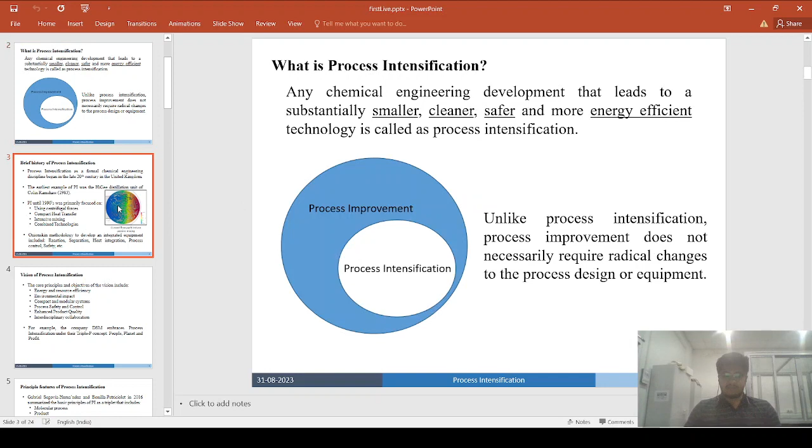So now we have first defined what is process intensification, then discussed the brief history of process intensification. Much more detail on the history has been discussed by Professor S.K. Majumder, whose course this is, so you can go through that.

And then after the history, what is the vision of process intensification? While performing process intensification, what does it provide to you? The vision of process intensification is actually quite a subjective topic, and it differs from company to company, organization to organization, institute to institute. But the core principles and objectives can be defined in 6 simple points.

The core principle behind process intensification is that we need to efficiently use energy and resources - raw products and energy must be used in an efficient manner, with no wastage of the raw product or energy used. The second vision of process intensification is to reduce the environmental impact of the particular process or plant.

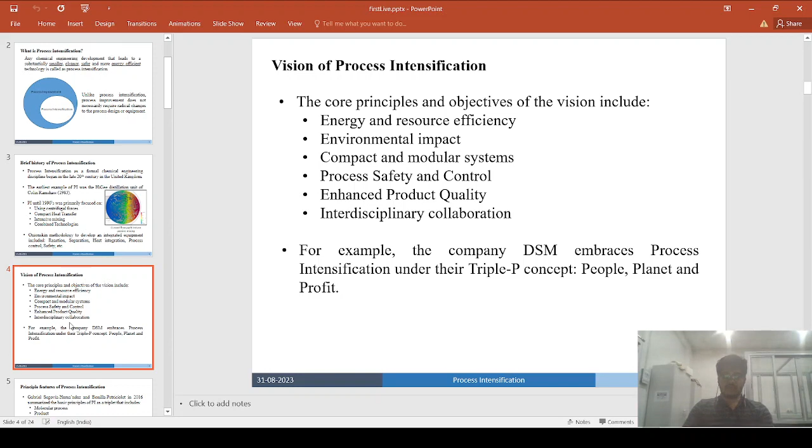Now coming to the principal features of process intensification. We have gone through what is process intensification, its brief history, and the vision of process intensification. Now coming to the principal features—how can you identify, or what are the features of process intensification, what it can bring to the table.

This has been nicely summarized by Gabriel Segovia Hernandez and Bonilla Petriciolet in 2016, that process intensification features can be summarized in three steps, or a triplet: molecular process, product, and process engineering.

First you start optimizing or intensifying the molecular processes itself, the reaction step—when one species reacts with another, how can you intensify or perform it better. Then once you perform the reaction better, keeping in mind your selectivity and conversion rate, you optimize as much as you can with the molecular process itself: how much temperature and pressure you can give it.

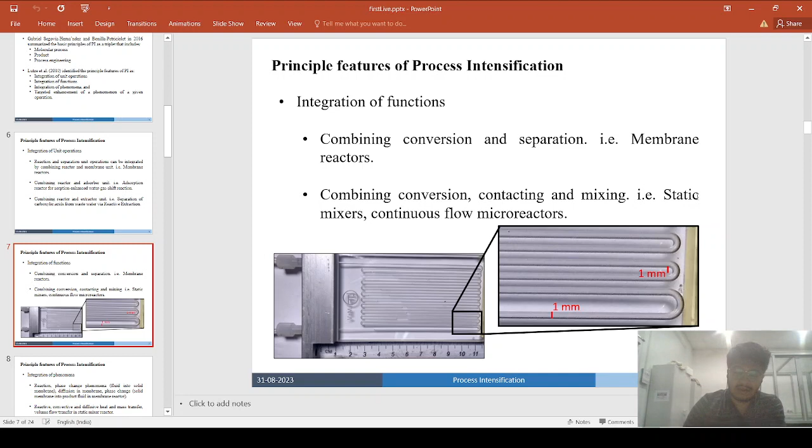So the contact happens due to significant increment in the specific area, or net available area for heat and mass transfer, and the mixing happens due to the curved flow path, and the conversion automatically increases in microreactors. This is one integration of function, combining conversion, contacting, and mixing, all three in a continuous flow microreactor, and similar can be done for static mixers also.

The third principal feature given by Lutze et al. 2010 is integration of phenomena. Different phenomena can also be integrated. For example, reaction, phase change phenomena, and diffusion in a membrane with phase change can be integrated into one - the reaction is happening and the phase change is also happening, so you can combine and integrate both. Another great example is reactive, convective, diffusive heat and mass transfer, volume flow transfer.

In a static mixer reactor. Just a minute.

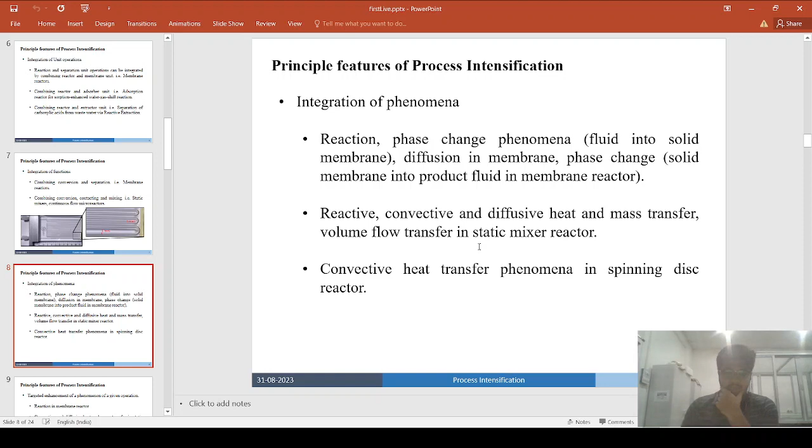The fourth principal feature given by Lutze 2010 is targeted enhancement of the phenomenon of a given operation - for example, reaction in a membrane reactor. You can enhance this by doping the membrane with a certain catalyst, which can enhance the reaction happening in the membrane reactor. Separation can be controlled, but enhancement of the reaction happens by choosing a different catalyst, or doping the membrane with it.

Another example is convective and diffusive heat and mass transfer in the static mixer reactor, which also comes under integration of phenomenon, but you can also target that. So integration of phenomenon combines two phenomena, but you can also target the enhancement of a particular phenomenon that you choose.

Another was convective heat transfer phenomenon in spinning disk reactor. In the spinning disk reactor, you use the centrifugal forces to create artificial gravity, like the HiGee distillation plant by Ramshaw. It's called high-G because G's are multipliers to gravitational force, like 1G and 2G, what pilots experience. Similarly, in the spinning disk reactor, you use centrifugal force to provide very high forces, termed high-G forces, which let you perform or enhance high convective heat transfer phenomena.

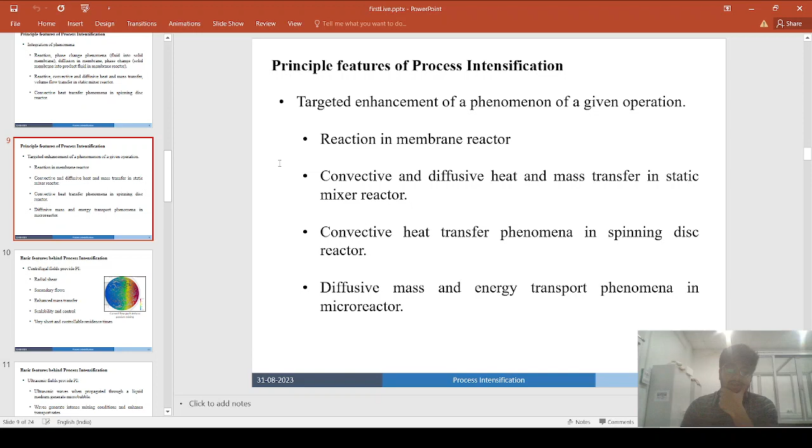That is the basic gist behind the four principal features that Lutze et al. gave in 2010. So now if you look at these basic features, these were the principal features that Lutze presented.

Now, if you've caught on to the common pattern, they all use some sort of unconventional field to enhance a phenomenon. In the high-G distillation tower, they use the centrifugal field, and even in the microreactor, to enhance passive mixing they use the centrifugal field of the curved microchannel to achieve process intensification. You can also use the ultrasonic field to perform cavitation and generate micro bubbles—that's another idea.

You can also use electric fields to generate chemical radicals or species radicals that enhance reaction steps. You can use electric fields, or electromagnetic fields, to target uniform heating in a specific area. Electromagnetic fields in the longer wavelength range include microwaves, and going shorter, past infrared, you get visible light. You can use visible light or general electromagnetic radiation to perform photoinitiation or photochemical reactions, targeting your light source, and these days you can also use lasers.

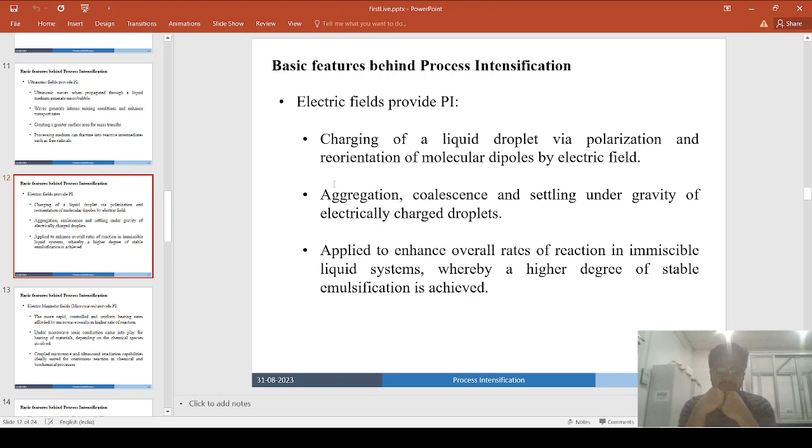To generate that stable emulsion, you can polarize those proteins, and because of that polarization they can form micelle structures, and remain in the emulsion state for a very long period of time. This can be controlled if you use an electrically charged droplet, so aggregation, coalescence and settling under gravity can be controlled.

It can also be applied to enhance the overall rate of reaction in an immiscible liquid system, whereby a higher degree of stable emulsification is achieved.

Protein globules and water are basically immiscible liquid systems. So how to make a stable emulsion is basically the way you can enhance the overall reaction rate. If both phases separate, you might not get good mixing and your reaction rate will get hampered. So a way is to make a stable emulsion, and this can be achieved by applying an electric field to perform process intensification.

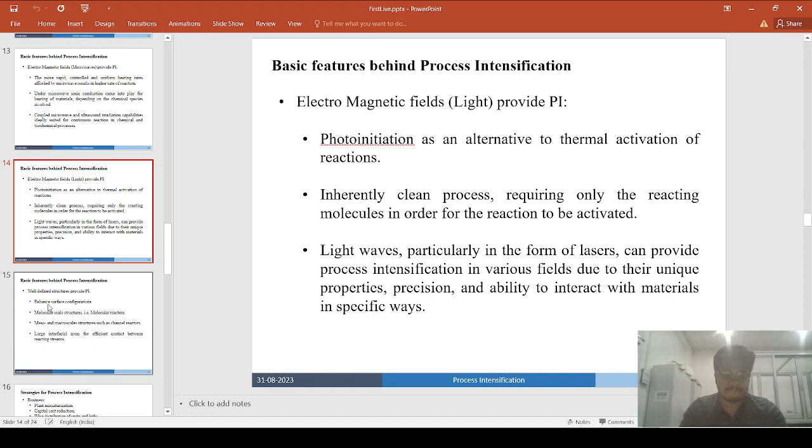Now, well-defined structures also provide process intensification. For example, you can enhance the surface configuration, like with lasers, to make surface areas of different properties, different wettability, or different surface roughness.

Another thing is molecular scale structures. There are various papers where they have made molecular cylinders. The reaction substrate looks quite smooth, but under a confocal microscope with objective lenses, you see small cylindrical structures where catalysts are loaded, or the cylindrical structures are doped with such catalysts. They basically mimic the finger-like structures we have in our intestine, enhancing the net available surface area for reaction or adsorption to occur.

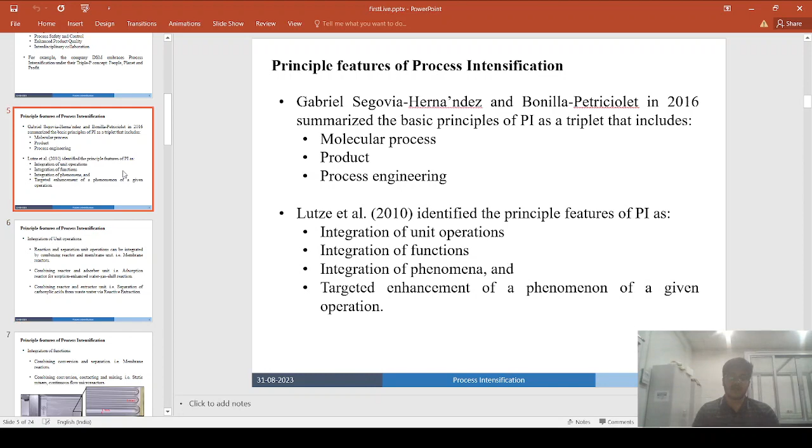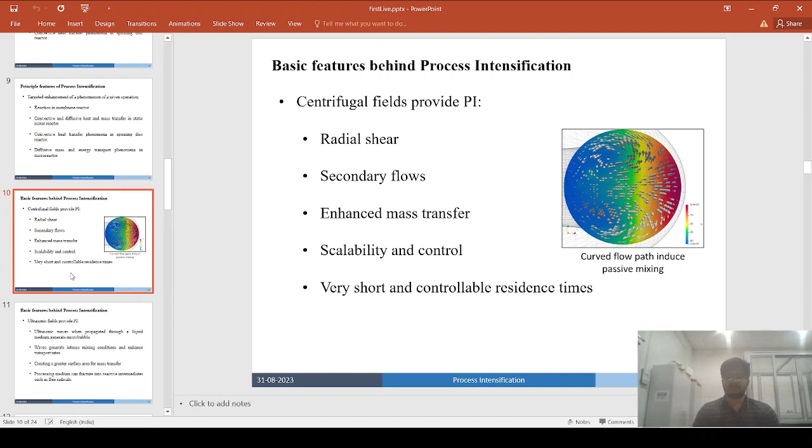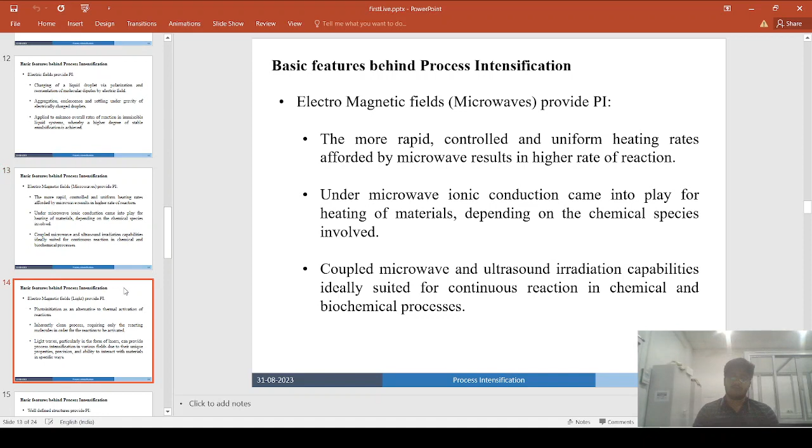So these four were the principal features. We have discussed in detail the four principal features by Lutze 2010, and then we discussed the basic features that can provide process intensification, like centrifugal field, ultrasonic field, electric field, electromagnetic field in the microwave range, and electromagnetic field in the visible light range. And then we discussed how you can also use well-defined structures to perform process intensification.

Okay, so let us discuss the strategies for process intensification, what strategies are available. There are various ways to define strategy for process intensification, but broadly they can be classified into three domains, or three classes.

On the business side, what process intensification looks like is plant miniaturization: how small, or how much, can you miniaturize your plant, so that some area or volume is not wasted. This means reduction in the spatial volume where the plant resides. If you occupy less spatial volume, you need to pay less rent, or less for the smaller area of land that you purchase. So that is the idea of plant miniaturization, to optimally use the area and volume available to you.

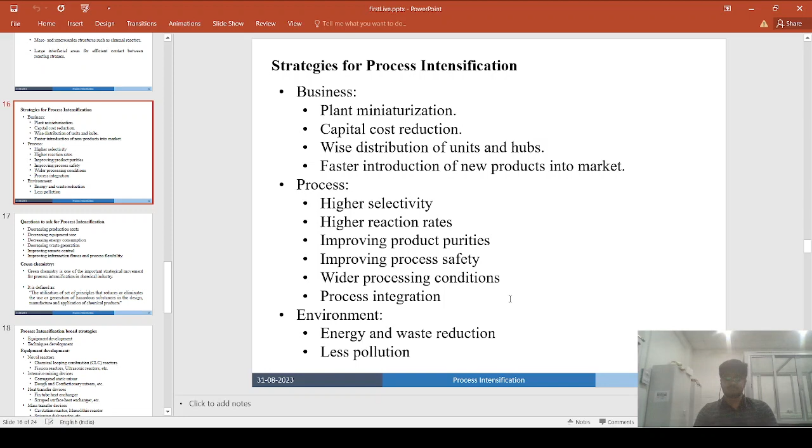Now, what are the general questions to be asked for process intensification? Process intensification is a very wide area and a very hot topic for research. So where do you start? Where do you generally start? When you have a lot of options, when there is a wide area, you basically ask the question: leave everything aside, where do I start? What is the initial point?

There is no single hard and fast rule with process intensification. It is not that this is the line and you must march on this line only. But you can start by asking the right questions.

How can I decrease my production cost, or how can I decrease my equipment size, or how can I decrease my energy consumption, or how can I decrease my waste generation, or how can I improve my remote control? How much of the plant can I operate remotely, and how much can I improve the information fluxes and process flexibility.

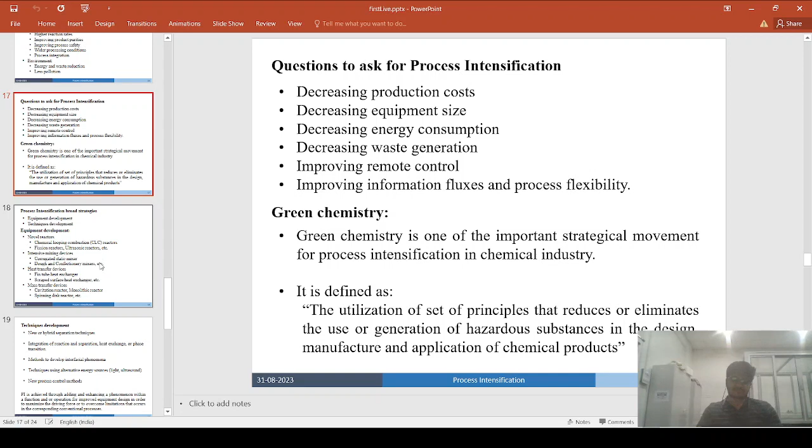The process intensification strategies can be classified in multiple ways. A broad classification has two types: equipment development strategy and techniques development strategy. The equipment development strategy involves improving or developing your equipment, or developing novel reactors. That's one thing. Or you can improve an existing process or existing reactor like a CSTR.

You can change the shape and size of the stirrer to optimally mix a certain viscous liquid, for a given liquid or gas-liquid system. This is basically the idea behind equipment development.

These equipment development strategies involve development of novel reactors—for example, chemical looping combustion (CLC) reactors, or developing fission reactors or ultrasonic reactors, etc.—and the use of intensive mixing devices.

You change your standard mixers into better intensive mixing devices, like corrugated static mixers, or for highly viscous or thick consistency materials, you can use modern developed dough and confectionery mixers. So you replace conventional mixing devices with intensive mixing devices suited to your systems, and also heat transfer devices.

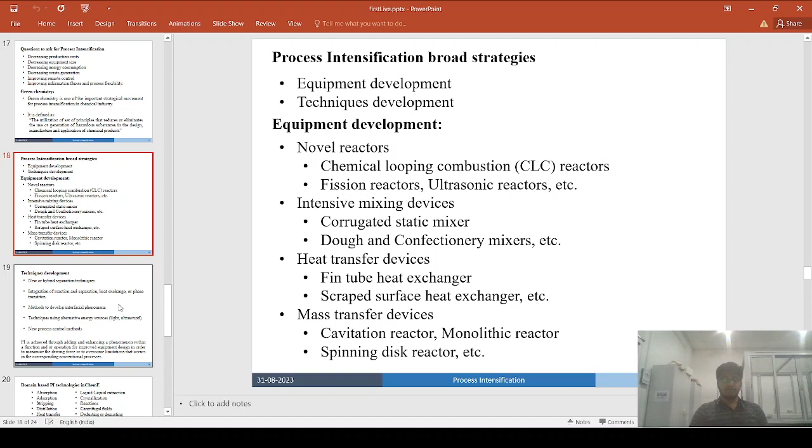So we discussed the equipment development strategy. Another is the technique development strategy.

Here you basically improve or utilize new or hybrid separation techniques to perform separation instead of standard separation techniques. Or you can integrate the reaction and separation and heat exchange or phase transition together itself. So this is one example. And you can think of methods to develop or enhance interfacial phenomena, using micro reactors, so that you can enhance the net available surface area. So that is one technique.

Or techniques using alternative energy sources like light or ultrasound. Or you can use new process control methods. So that is the idea behind that.

So process intensification is ultimately achieved through adding and enhancing a phenomenon within a function or operation for improved equipment design, in order to maximize the driving force or to overcome limitations that occur in the corresponding conventional processes. So process intensification can be achieved by adding or enhancing a particular phenomena occurring within a function, or by enhancing the operation for improved equipment design, in order to maximize the driving force or overcome the limitations in conventional processes. This is the idea behind process intensification.

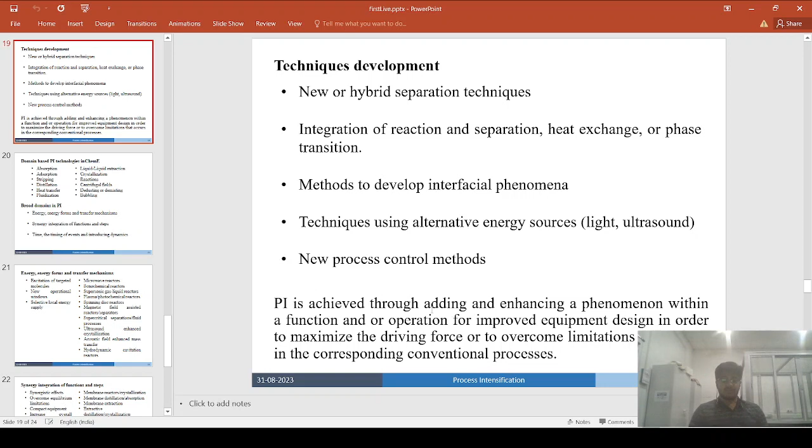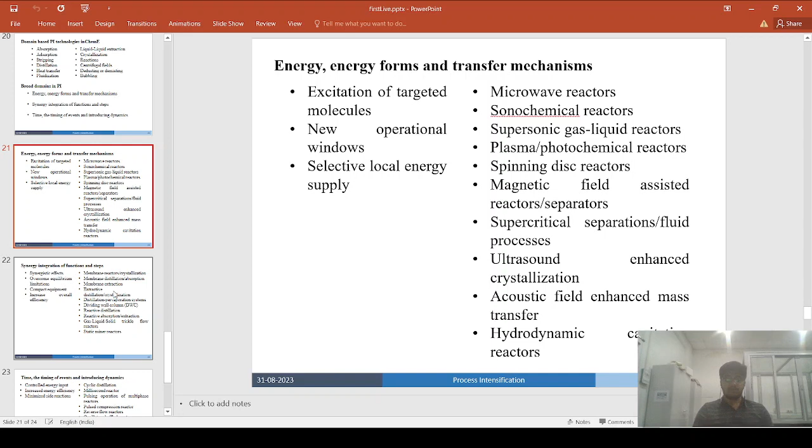So these were the examples for process intensification with focus on energy forms and transfer mechanism. Now, if you want to perform process intensification with focus on synergistic integration of function and steps, your focuses should be on synergistic effects, overcoming equilibrium limitations, and making your equipment compact.

And the last, very important focus you should put emphasis on is how to increase overall efficiency.

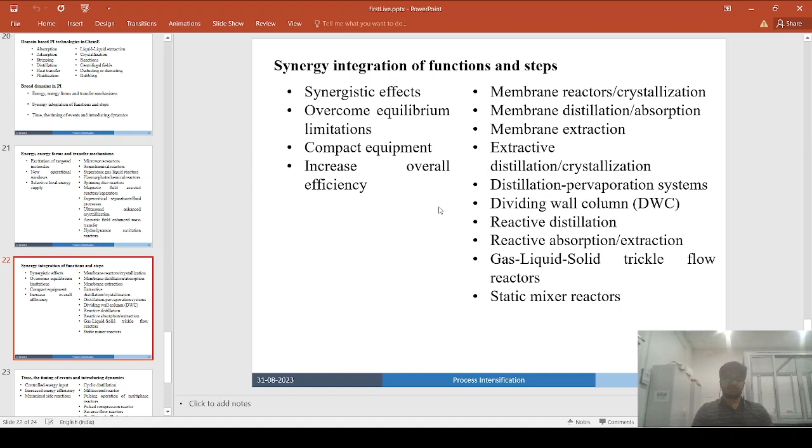Some examples here are membrane reactor and crystallization, membrane distillation absorption, membrane extraction, extractive distillation crystallization, distillation-pervaporation systems, dividing wall column, reactive distillation, reactive absorption extraction, gas-liquid-solid trickle flow reactors, and static mixer reactors - examples for process intensification focused on synergistic integration of function and steps.

Now, if you want to perform process intensification with focus on timing of events and introducing dynamics, the focus should be on controlled energy input. For example, if I want to irradiate a process with a laser with a pulse duration of 10 nanoseconds, 9 nanoseconds, or 4 nanoseconds...

...the light strikes the surface, or the surface is exposed to light for just 4 nanoseconds - you control that small pulse duration of the laser. So that is the controlled energy input, how well you can control that time.

The second focus should be on increased energy efficiency - how efficiently you can deliver that energy. Even with an exposure time of 4 nanoseconds, it shouldn't be that the energy delivered is also very small - the required energy should be delivered within that same 4 nanoseconds. So how efficiently you can deliver that energy is the focus.

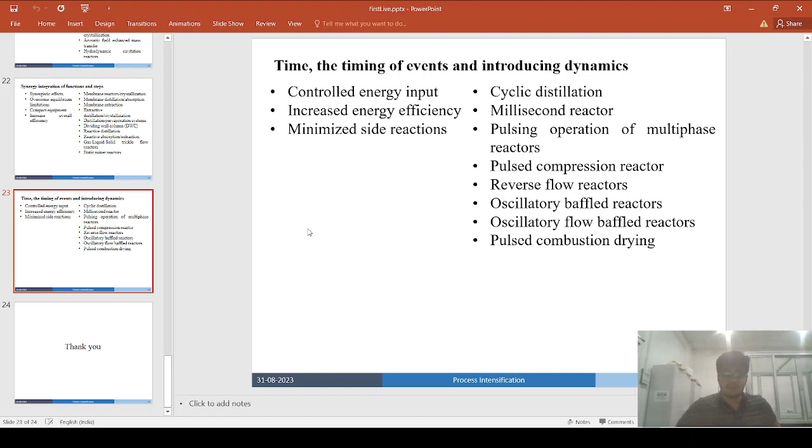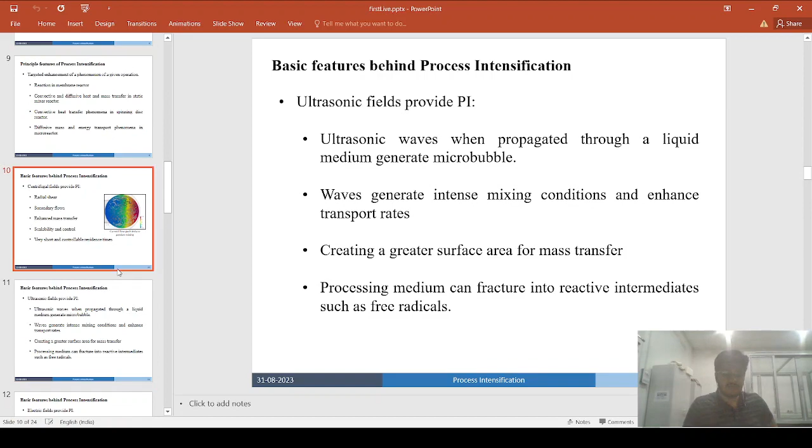I think all these slides would help you in completing the assignments, and also in studying for the course, and ultimately when you give the final passing certificate exam for this course.